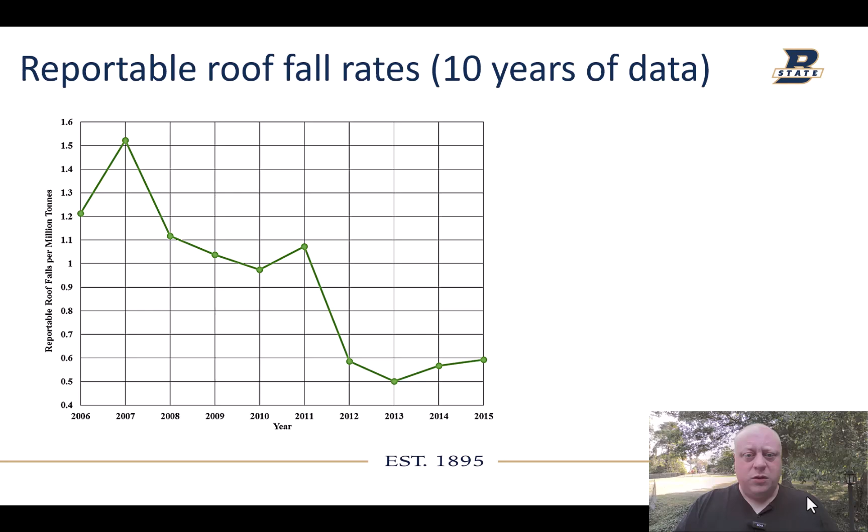The injury rate also went down, right? Had a downward trend, and then sort of leveled out there again at the end of those couple of years. But that was the range we were looking at the time.

But what I wanted to know was not just if a roof fall was reportable, but I wanted to know if a roof fall resulted in a blockage of the gate road, so a tailgate blockage, or a fall on the stage loader or something like that, or a fall that occurred in other areas of the gate road, but places where mine workers would typically be traveling or working in, right? That's the ones I really wanted to focus on, because those are the ones that really matter when we're talking about gate road support, right?

And so you see a huge downward trend in tailgate falls, tailgate blockages towards 2010, and then it decreases again after a couple more years. So we've gotten really good at stopping these tailgate blockages. Primarily, it became a major concern after the Upper Big Branch explosion, right? That not having two means of egress off the face was not acceptable. But you do still see a few of these blockages.

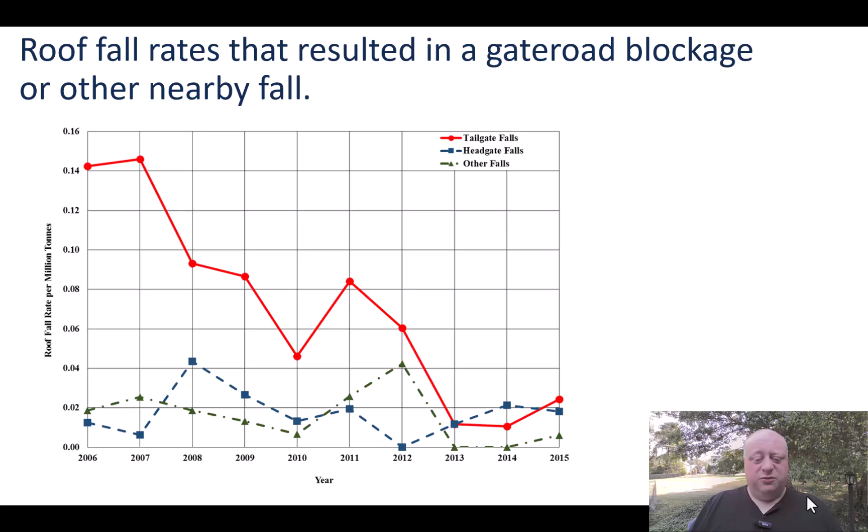So what we see here, there is a little bit of a discrepancy. The way I retrieved this data is I actually manually read the narratives that were written in the reports for all of these cases. So there is some ambiguity in where some of these cases occurred. So there is some amount of error in this, but I think it's relatively low, and I still think this gives a good picture of the roof fall rates that have occurred in this country in that time frame.

So from there we jump into summary statistics for general mine data. Kind of like those charts we saw in the Coal Age longwall census, I did these for all of our cases, right? So this paper I will put on the website as well for you to read if you'd like.

The way I did this was we went to 11 longwall mines, and we got as many cases from there as we could, because some mines would have more than one different support layout in different areas of the mine. And then I gathered previous reports in that same time frame for other mines that other researchers had gone to, and I took as much data from there as I possibly could too. And that's how I ended up with the 25 case histories from 21 different mines that went into this paper.

At that time, the range of depth of cover was from 400 feet to 3,000 feet. Yes, we were still mining 3,000 feet of cover at that time out in Utah. We're not anymore currently, but it could happen again. And mining heights ranged from 6 to 11 feet, and then 16 to 22 foot wide entries. So you see the averages come out to be about 1,300 feet of cover, 8.25 feet mining height, and an entry width of 19 feet.

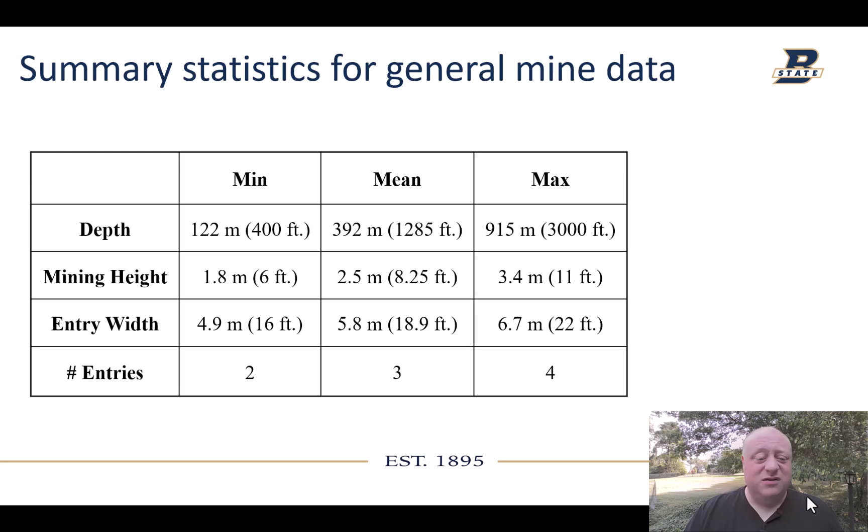Oh, and the number of entries too. You see it ranges from 2, like the yield pillar layouts out in Utah. The average is 3, which is what you see in most mines, with a maximum of 4, which at the time was only in one mine, so I think a lot of you might know where that is.

As for the summary statistics for the panel layout, you'll see on the right side an N value. I didn't have this data for all of the mines in the database, right? So the N value represents the number of mines that had this particular bit of data in the report that I could pull from. And so our gate road widths range from 67 feet to 290 feet.

What I mean by gate road width is the entire distance across the longwall gate road, like we've seen in some of the panel layouts that we've looked at. This gives you an idea of how much pillar support is left in the ground in between those panels, without knowing the complete details of the pillar dimensions.

And so you see 67 feet on the left. Of course, that's about a 30-foot rib to rib yield pillar, right, out in Utah. And of course, the max at that time was 290 feet, which would be a deep cover mine that had large abutment pillars in it.

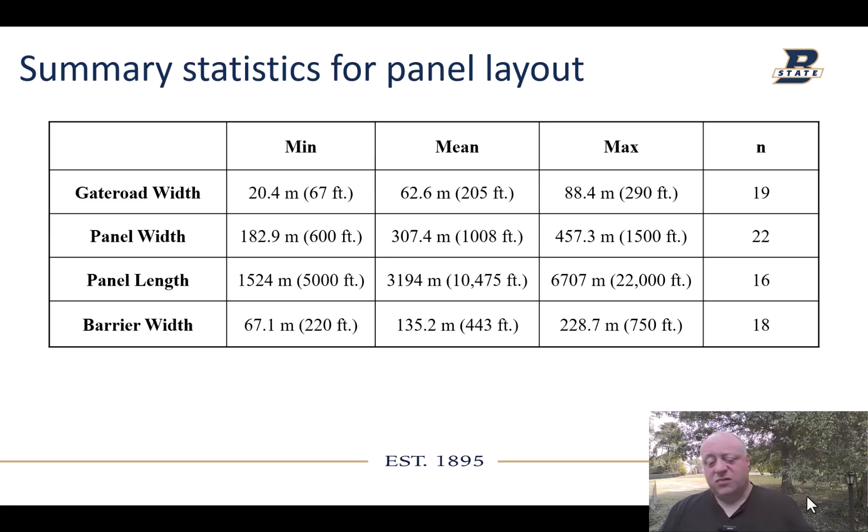Longest panel at that time, 22,000 feet. Average was 10. I bet the average is now closer to about 12 or so. Barrier pillar widths. Okay, so barrier widths between districts, or at the mouth of the panel, these ranged from 220 feet to 750 feet. Lower amounts would mean lower stress or lower cover, right? Higher or wider barriers for deeper cover mines. And that average being about 440 feet or so.

Before we get into the details about the actual support itself, there is an equation you need to know, the reinforcement density index, okay? And for standard units, there's a conversion factor of 14.5. And then you basically just multiply the length of the bolt by the number of bolts per row, right? That's typically 4, sometimes 6, sometimes 5 even. Then you multiply that by the ultimate strength, or the ultimate capacity of the bolt. And that value is in kips, so it's in thousands of pounds. That's one of my least favorite units, but structural engineers like it, so that's, I guess, why we're doing it for roof bolts. And then you divide that by the spacing between rows and the width of the entry, right?

So what you've kind of calculated here is sort of like how much one bolt is doing, right? It's the length times, based on that, sort of like that tributary area, right, that the bolt's working in. And then the index is calculated like that.

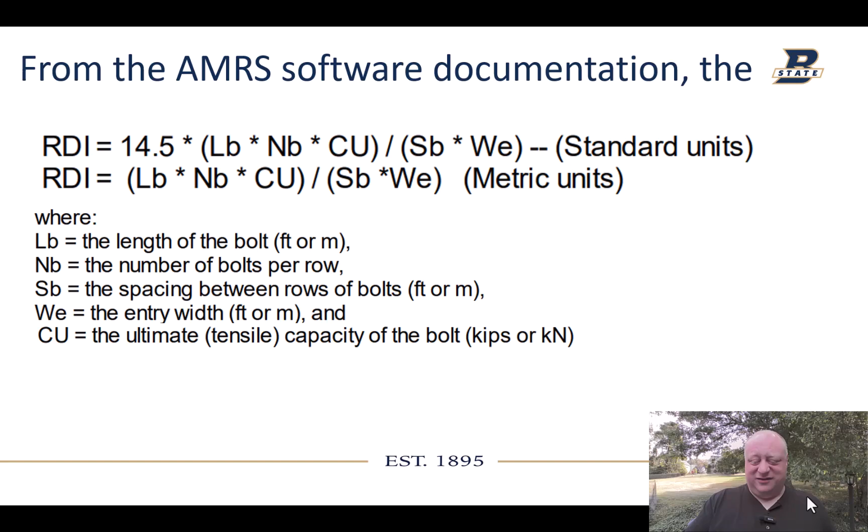Okay. Row spacings was 4 to 5 feet. Occasionally in a bad area, you'd see that spacing tighten down to 3.5 feet or maybe even 3 feet. But I used the sort of average of what the conditions were and what they were using. So 4 to 5 feet, right? And then, of course, with that RDI calculation that we talked about on the previous slide, I came up with reinforcement density indices of 57 psi feet to basically 130 psi feet, with about 84. And so that gives you an idea of how much support is in the roof. And like I said, it's based on bolt length, the number of bolts, the strength of the bolts, and the spacing, to get these numbers.

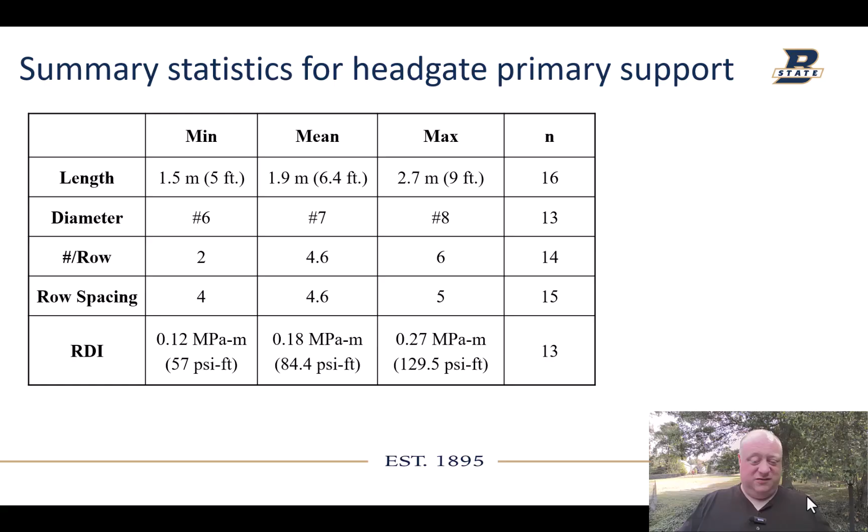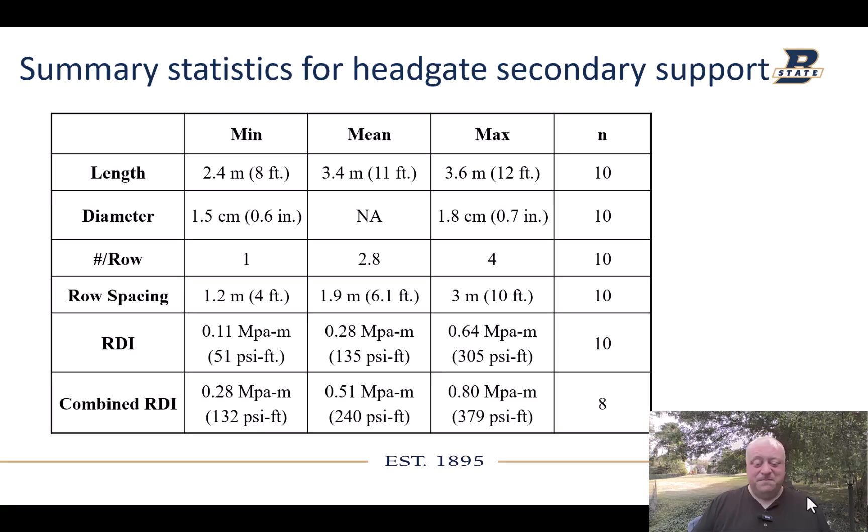As for standing supports, you're going to see several different things out there. First of all, wood cribs, which are going away rapidly. Probably, I would say. You'll see in here that there's even less mines now that are using them. And also could have an engineered wood crib, which is maybe more popular because they are very strong, and it's still a wood product. It has a very large range of deformation. You can really squeeze these things a lot, and they don't really fail. They just get stronger over time. They strain harden. So you're probably more likely to see one of those, an engineered wood crib of some kind.

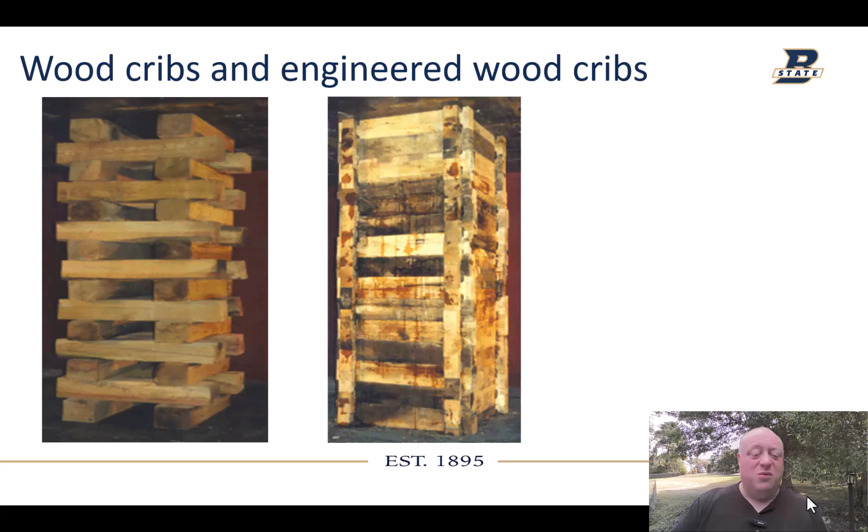To my knowledge, there's not a mine that's using wood cribs entirely in the gate road. Since Federal No. 2 closed, there could be one that's popped up and I'm not aware of, but you might see it out there. Prop setters and cluster props. Sometimes these can be used, especially if you have a mine that's not that deep and has a decent roof. You might be able to get by with these, right? And they're a very strong prop too. They do have a significant range of compression that you can go through, and allows that prop to deform a bit.

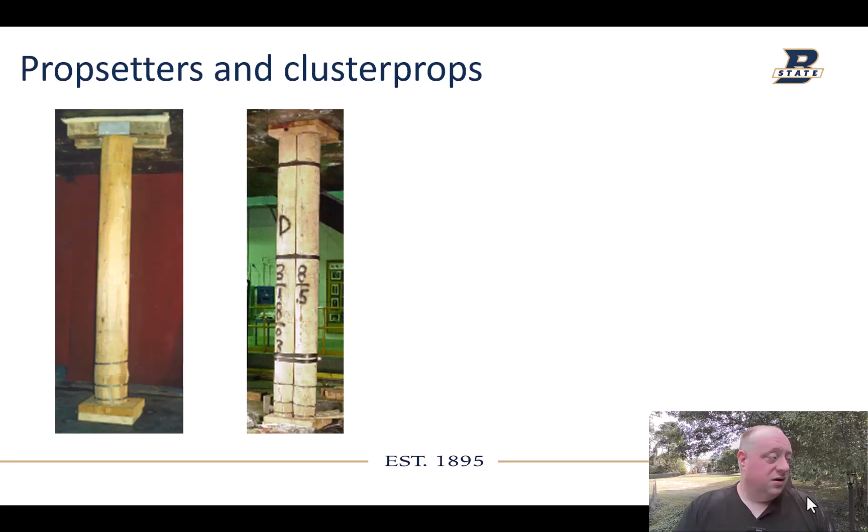There is a current issue with these though, that there's been issues getting the wood, the poplar trees for these again. This has happened before. It's the main reason you don't see wood in the western United States. They just can't get it. Might as well just use cans and pumpables, which is what you're going to see on the next slide.

Cans and pumpables, right? So non-wood support, the can on the left, this steel sort of liner, and then it's filled with a cementitious type grout. And then that can just sort of folds, right? And almost crushes like a pop can, but it just folds over and over and over on itself and allows a tremendous amount of deformation before it fails. It's an extremely good support. If you need a lot of capacity and you're going to have a lot of deformation, it's a good call.

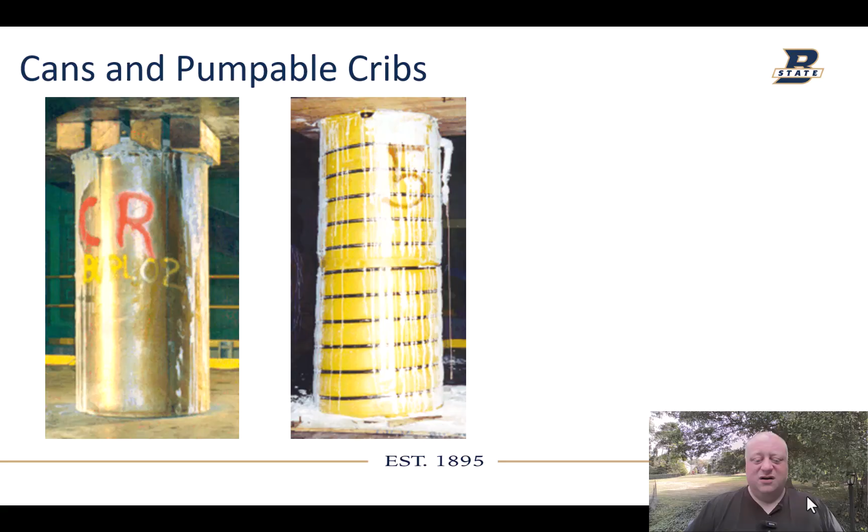Pumpable cribs, they're great. They're the easiest to install. They're usually the most expensive. Well, cans are pretty pricey too, but usually the most expensive, but they're the easiest and fastest to install. Sometimes speed's worth paying for, right? You're making money on how many tons you can put on the ground, outside, on the train, in the customer stockpile. That's where you're getting paid, not off of what's in the ground. So speed's important. And it's also a lot easier on the labor force.

So what would happen was it would hang up for a really long time, and then it would fall basically up to the shield line or close to it. And what's kind of happening was you were breakering that fall with the cables, right? Just like you would on a pillar line if you had breaker cables, right?